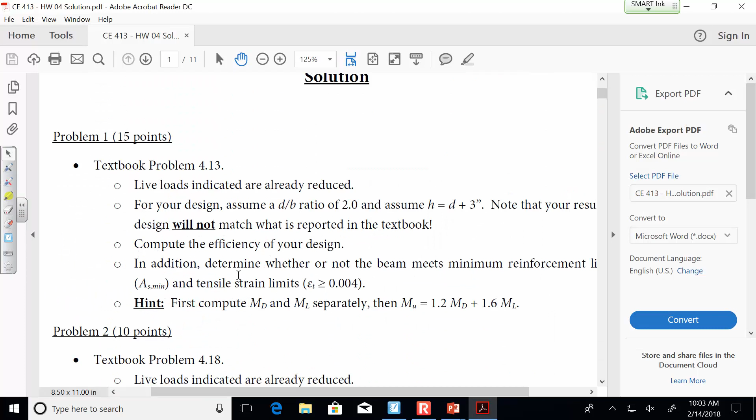Sound good? Okay, I said I would mention a couple things about homework 4, so I thought I'd pull this up. One of the things about homework 4 is that there's a lot of supplemental instructions. For instance, on problem number 1, you're going to do textbook problem 4.13.

There's a couple points to go along with that. The live loads indicated in the problem are already reduced, so you don't have to worry about live load reduction. Now, this second bullet is kind of important: for your design, assume a D over B ratio of 2, and a height of the beam of D plus 3 inches.

Because of that, whatever design you get is not going to match what's in the textbook. The textbook has a design, and it's not going to match. So everybody's going to say 'well, I didn't get what's in the problem' — well, that's why, that's sort of on purpose. These next two: just make sure you compute your efficiency and determine whether or not the beam meets your ACI limits on strain and reinforcement. No big deal, that's basically what you did on homework 3, that's sort of the point of homework 3, so it wouldn't hit you like a bucket of water.

And then the last one, this is a hint — I talked about this in the last example on the slab. Compute the dead load moment and the live load moment separately, then do your 1.2 dead plus 1.6 live to get the factored moment. Don't try to get a factored load and then do WL squared over 8, that's not correct, that won't work. So that's my hint on that.

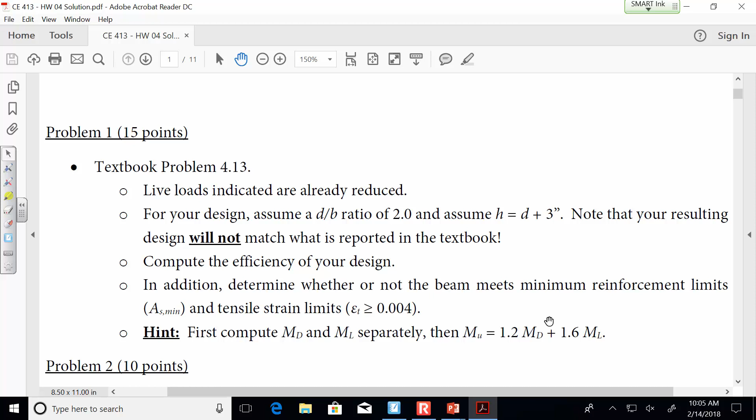On problem 2, what I did is I actually gave you the dimensions of the beams.

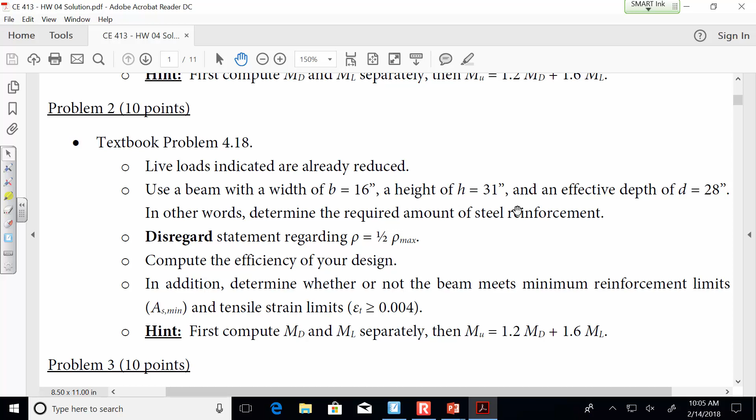The idea on problem 1 is an unknown cross-section. Problem 2 is a known cross-section, so you have the dimensions. The live loads are already reduced. There's a statement there about rho—disregard that statement regarding rho. Compute your efficiency and ACI limits, and the same hint on the moments. Problem 3 is simple, just a slab problem, and the live loads on that slab problem are already reduced. Just 3 problems, yes.

Just 3 problems. Scroll down a little bit more. Is there more? I mean, it's 11 pages. That's the solution. Yeah.

I could, yeah. I don't love you that much. But nice try.

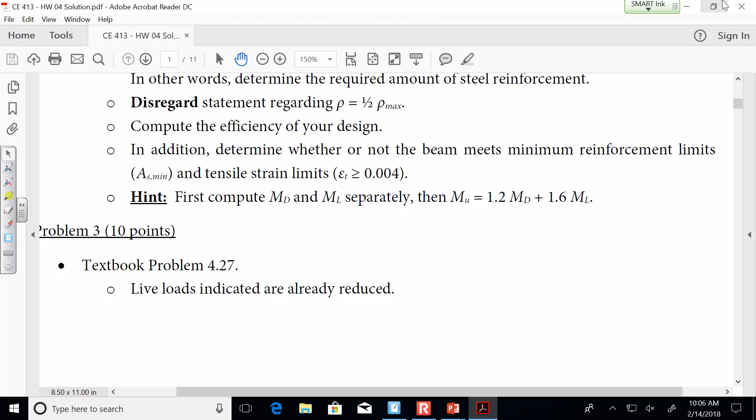So today what we're doing, just so everybody's aware, we are starting material that is not going to be on exam 1. However, two things. One, I don't want you to think it's unrelated to exam 1 material, because it is kind of related. Up until now, a lot of our analysis and design procedures have been focused on rectangular beams, just a rectangle.

And what we're going to be doing now is assessing beams that are of a different cross-section. So it's not like the underlying design principles and mechanics are any different, because they're not. I mean, it's still 0.85 f c prime, it's still the same strain limits and all of that. That's all the same. The only thing that's different is the geometry of the beam. So I know it can be tempting to go, oh, this is exam 2 material, let's just not pay attention. Well, it actually, no pun intended, will serve to reinforce what you're learning on the material on exam 1. I swear I didn't mean for that to come out funny, but it came out a little funnier than I thought. And point two,

I will go ahead and tell you this. This might surprise you. I told you this isn't exam 1 material. It's actually not even exam 2 material, okay? I'm not going to put flanged sections on exam 2. I'm not going to put doubly reinforced sections on exam 2 either. I am going to give you one beefy homework assignment on it, though. But the upside is that you don't have to do it on the exam, because while this is incredibly important material, it is still just more beam stuff, and since exam 1 is basically on moment and on beams, I feel it's not really, why test you again?

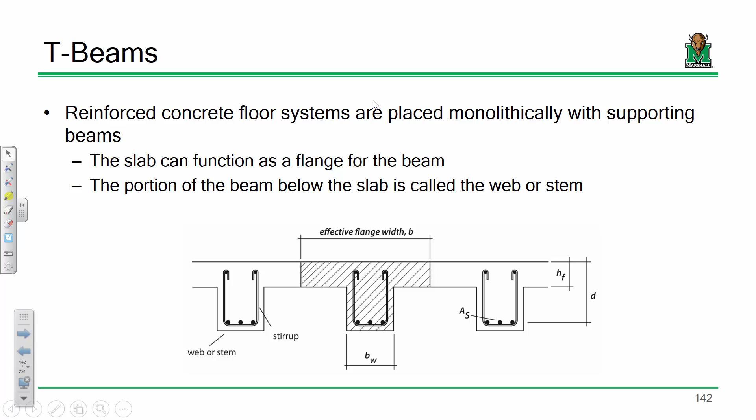Now that's looking at it from the load standpoint - how much load is that beam responsible for. But now I'm asking a different question. If I have this beam and this beam, and slab system cast together, how much of that slab can I count on to be effective for that beam from a resistance standpoint? Is it the tributary width? Maybe it's a little less, maybe it's a little different. What I'm talking about is a concept called effective flange width - how much of that slab can we consider effective in transferring load to that beam. Sometimes it's the tributary width, sometimes it's a bit less.

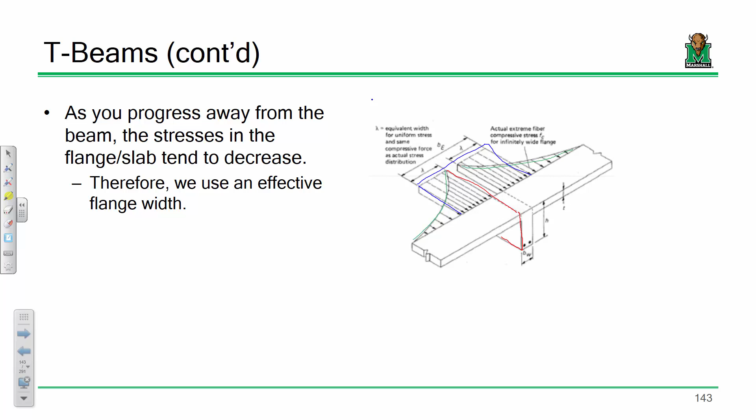Now, let's be clear - what we are talking about is a very complex analytical challenge. It's not simple, it's not something I can just write a differential equation for and solve for x. This is 3D. We're talking about different material behavior, and transfer of stresses longitudinally and transversely. This is not easy to determine, okay?

As you are aware by now, we as engineers sometimes encounter really complicated problems, but unfortunately we've got to have an answer for them. And that's where an empirical relationship comes into play. You've all already used empirical relationships here - the square root of f'c that shows up from time to time, even 0.85 f'c is an empirical relationship. You've probably seen empirical relationships in other classes like hydraulics or transportation. This is another empirical relationship, okay?

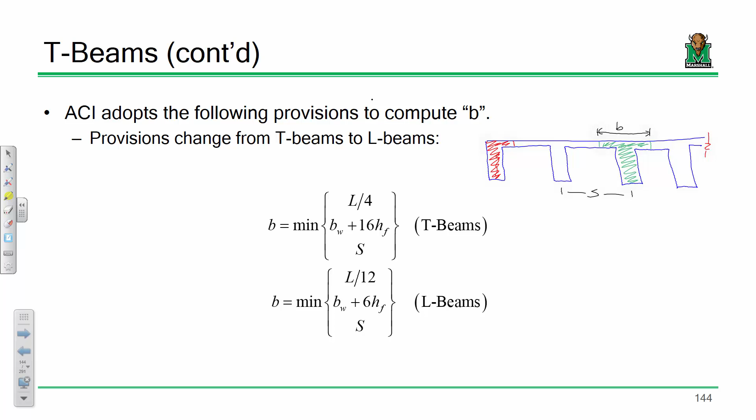Okay, now there's another little challenge that pops up in T-beam analysis, and that's this. I'm going to throw out two terms at you that are going to seem really strange: rectangular T-beam, and true T-beam. Okay? Here's what I mean by that.

Let's look at this from an analysis standpoint. Let's say we're trying to determine MN, nominal moment capacity, or phi-MN, design moment capacity. Doesn't matter, either one. But what's the first step in either one of those computations? Well, it all starts with equilibrium, right? It's the same thing with a rectangular beam or the triangular beam you did on that last homework assignment. No different. I have some tensile force, right? So the tensile force is the area of steel times Fy, and that has to be matched by some compressive force. The compressive force is something like 0.85 Fc prime times whatever area is in compression.

Make sense? So then what you would do is take that relationship and determine how deep does that stress block need to be such that C equals T. But really, in general, what we were determining is how big does that stress block need to be, what's the area of that stress block, such that compression equals tension? Make sense? Now, dependent upon your dimensions and proportions, the area of the steel, etc., you could wind up with one of these two scenarios.

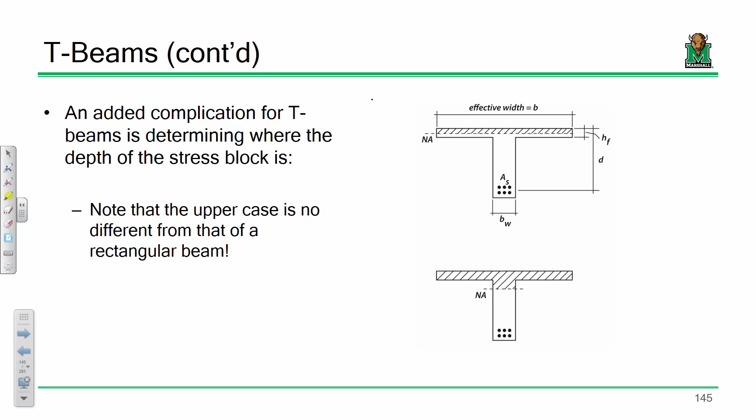One of the things we're going to have to do in a T-beam analysis is actually figure out which one we're dealing with, so that'll be an added complication. Don't worry, we've got a few different examples looking at this, two examples looking at different T-beam scenarios. What I want to do for this, we're in analysis phase, not design phase. What I want to do is compute the flexural capacity of this beam.

So I'm really looking at this from a nominal moment capacity. I just want to stop this at phi-MN. Okay, so I've got a beam.

Now let's make sure we're clear on the terminology. So D is 24 inches. That is from the top of the cross section to the center of the steel. It goes from the top down to the center of the steel. Now, let's see, what else do we have?

So H sub F, I don't think we've dealt with this one directly yet. H sub F is the thickness of that flange, and the thickness of that flange is 4 inches.

Now we have an area of steel. It's actually in 2 layers. That's not really going to matter for our purposes, you're going to see how that isn't going to matter here in a second. So we have 6 number 9 bars. Remember a number 9 is 1 square inch. This is pretty easy. Now let's make sure we're clear on the difference in the B's.

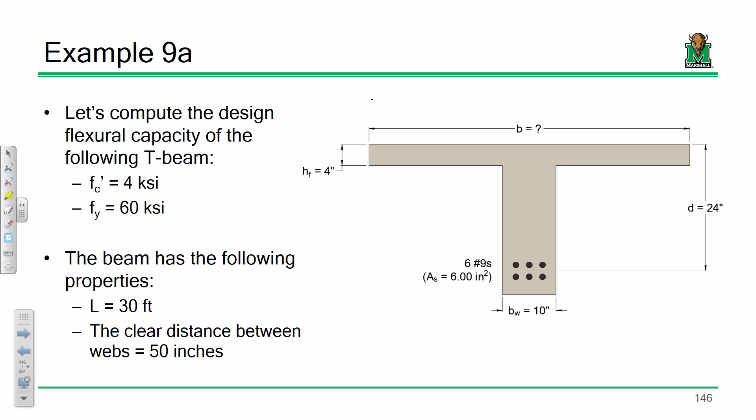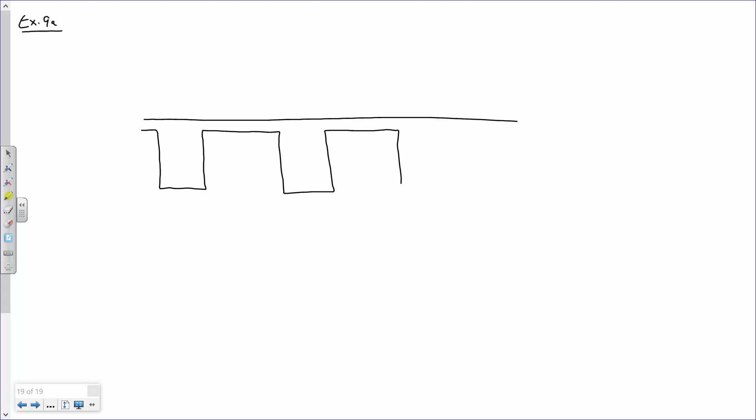Okay. Don't worry, a lot of this is going to get repeated. All right. Okay, so this is going to test my 3D art skills a little bit, but we'll make it work. All right. Actually, I don't like that. All right, so okay. All right.

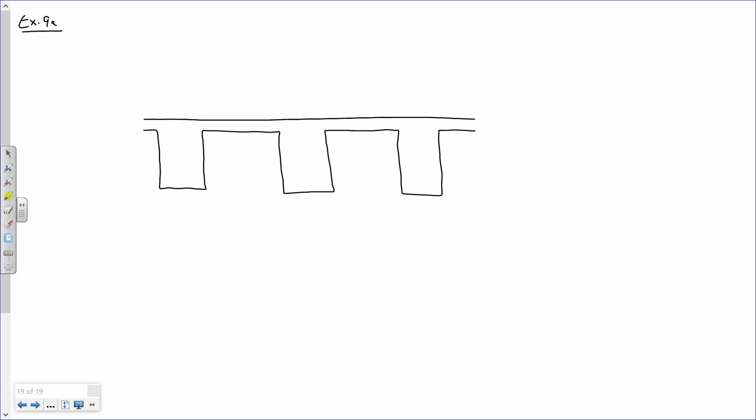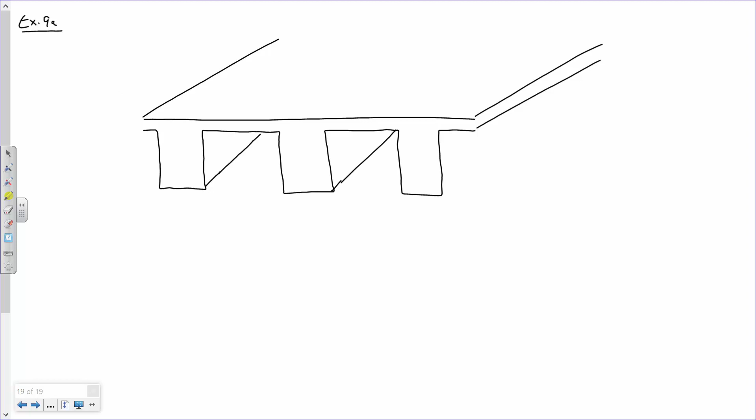Okay, so here's our floor system. Let's get a couple dimensions on here. So this dimension here is H sub F, and that is 4 inches. And then this dimension here to where the center of the rebar is, D, and that is 24 inches.

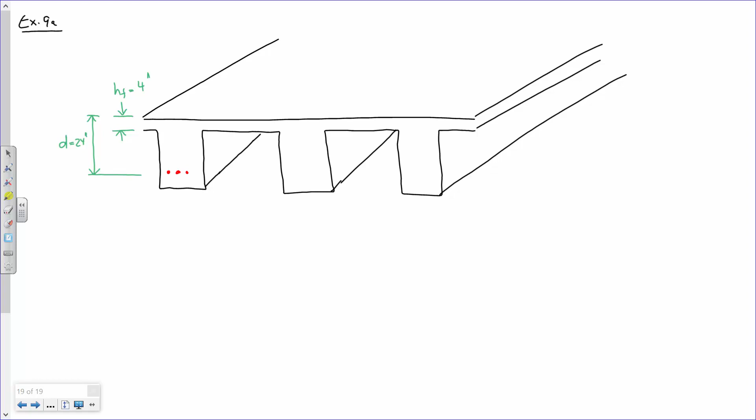Now, this system has sort of 6 bars, sort of looks like that, and they sort of go along the beam. And ultimately what we're trying to determine for a given beam is what is that effective flange width, or at least that's what we're trying to determine right now.

So, about like that. And so we're trying to determine B is trying to determine that dimension right there.

Okay, now let's be clear on something. The problem gave us a few things. It told us that the span length was 30 feet, which we'll need that here in a second. It told us that the web width was what? What was BW?

10 inches. But then what was the other dimension it gave us? It said the clear spacing between the webs, 50 inches. Now, clear spacing between the webs, what we're talking about is literally from face of web to face of web. In other words, if I went out there with a tape measure, what can I measure easily? It's from here to here. Measure that out. Okay, so help me out.

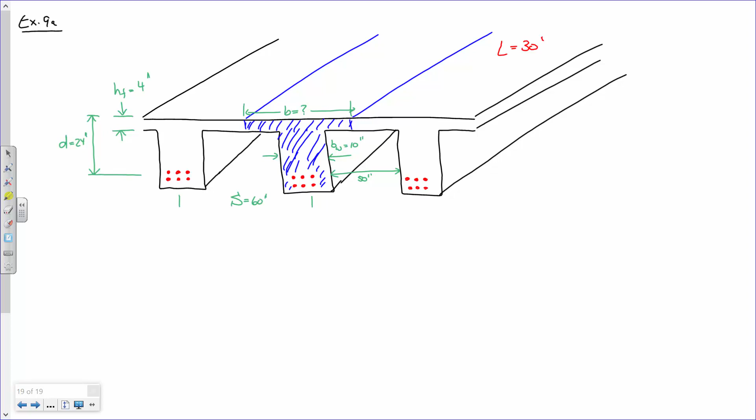What is the actual beam spacing, the center to center of the beams? It's 60 inches, right? Because it's 50 and then half a web on each side. So from here to here, S, and let me do this. When I write my S's, I put a little tick mark on there so that I don't confuse it with 5s. All right, does that make sense?

Okay, all right. Now we need to determine what that B value is, and it is computed as the minimum of L over 4, BW plus 16 HF, and then S. And then again, I like to put myself a little tick mark on there so that I know that's not a 5.

Now watch this, okay? Let's do the middle one first. So that's 10 inches plus 16 times what? 4 inches. Okay, let's do the bottom one. What's the beam spacing? 60. Now what do I do on the top one?

So it's 30 feet, so we got to convert. So 30 feet times 12 inches per foot, divided by 4. So does that make sense?

It depends on your dimensions. When your S changes, your B changes - it's basically the same thing, right? Let's do some number crunching. What are we getting for each of these values? 90, 74, and 60, okay? All right, what happens if your flange height changes to like 3 inches?

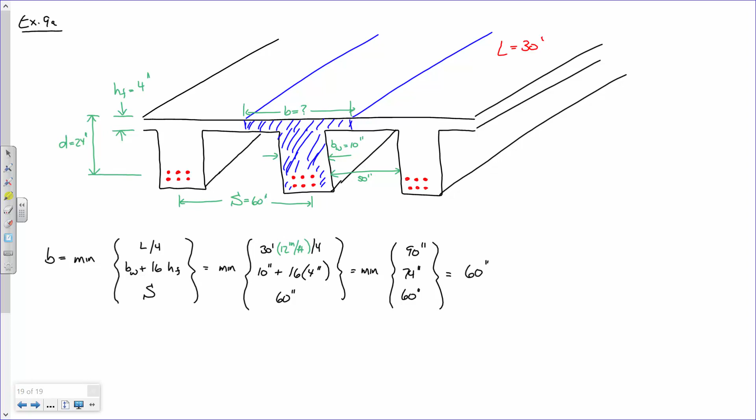No, that's a great point, but that's not what I said. Let's also remember we did slab design and placed reinforcement this way, so it's not like the slab is just hanging out in space unreinforced. Don't confuse that. Remember, there is a difference between how much that beam has to hold up from a load standpoint and how much of that slab we can count on to help that beam hold up that load. Not the same thing. Does that make sense? It just so happened to be the same for this example - not always the same.

Does that make sense? Okay. Now the next step we have to do is make an assessment as to whether this is a rectangular T-beam or a true T-beam, okay? Let me show you how I'm going to do that. We're going to determine the location of the neutral axis.

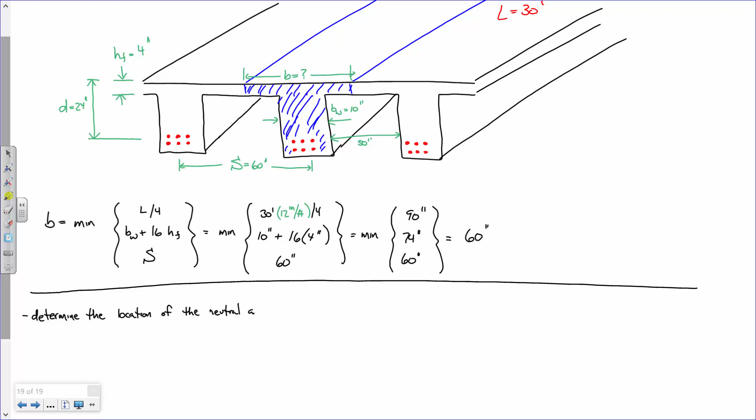Okay, now we're going to do that based on the principle that C equals T. Help me out with this - what is the tensile force in a given beam? Just AS times FY, okay? Now, regardless of the geometry, ignore the geometry - how do we generally determine the compressive force?

So what's the area of steel? 6 square inches times 60 KSI divided by 0.85 times 4 KSI. So what does that come out to be? Square inches - it's an area, right?

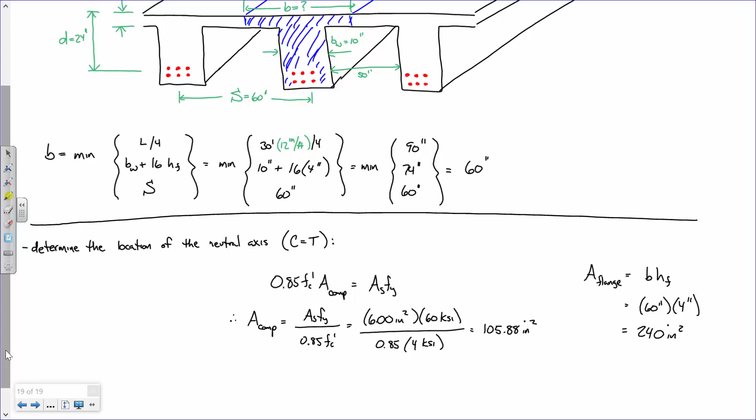Okay, so I'm just curious - based on these numbers, it's a rectangular T-beam, right? It's not a true T-beam, okay? Here's the reason why. Here's your beam.

Okay, so what we did for this area of the flange, we drew a dashed line, and the area of this box up here is like 240 square inches. But we only need 105.88 square inches in order to maintain equilibrium. So what we've got is a stress block that looks something like this. The area of the whole thing is 240, the area of the stress block is only 105. Therefore, we've got a rectangular T-beam.

I'm still confused on what's the difference between a true and rectangular. Okay, basically, if it was over 240, then it'd be a T, right? It's going to be a little clearer after the next example, but just bear with me on this explanation.

Do you agree that the area of the top of that flange is about 240 square inches? Would you agree that the amount of compressive stress block we need is about 106 or something like that? So we can fit that stress block up here. So the stress block, what does it look like? It's a rectangle, right? So this is a rectangular T-beam.

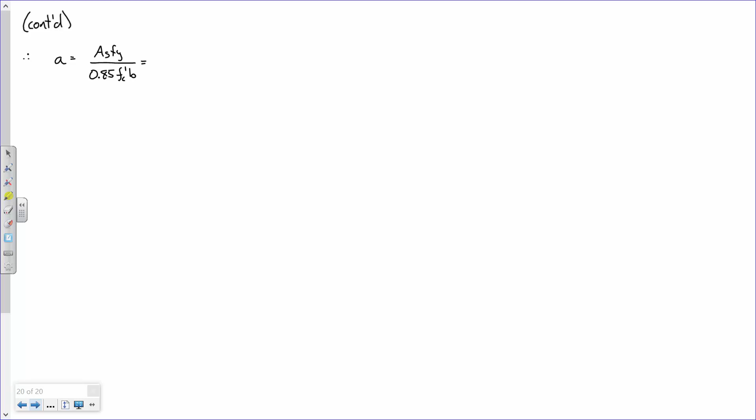I propose that if you have a rectangular T-beam, then the calculations are as follows: A equals As times Fy, divided by 0.85 Fc prime B. Now pop quiz, which B do we use? That would be the depth of the stress block. No, A is the depth of the stress block—you're right about that—but what B do we use?

60. We use the width of the stress block. So: 0.85, 4 KSI, 60 inches, and then 6 square inches times 60 KSI. Now let's compute this and see if this is a number that makes sense.

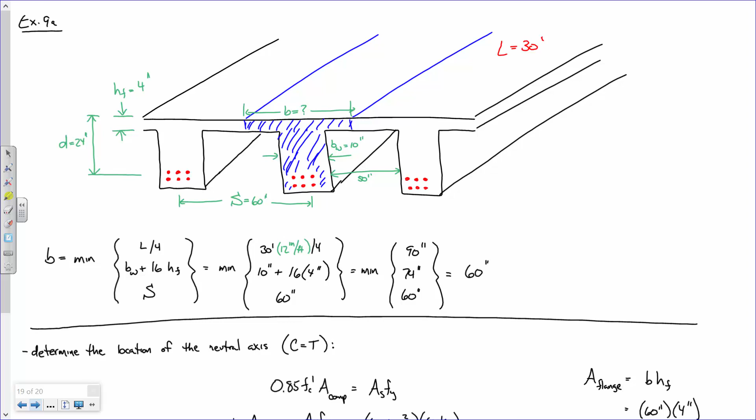Without doing any calculations, would it make sense if this came out to be exactly 2? Let me illustrate what I mean. Not exactly 2, because for the depth to be 4 inches, like if the stress block was 4 inches deep, the area would be 240. If the stress block was 2 inches deep, it'd be 120, right? So what I'm saying is it's probably a little less than 2. 1.76 - does that make sense?

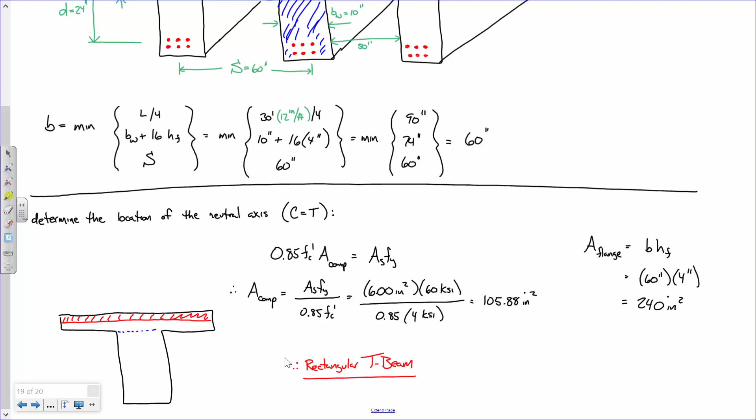If the rectangle is 4 inches deep, it's 240 square inches. So for it to be 105.88 square inches, it's probably got to be about 1.7 something inches, right? Does that make sense? Again, I want this all to make sense. Are y'all good?

1.765, is that what we got? Okay, so now that we've got this, we can compute our Mn just like we did before. This is no different, it's just a rectangular beam. As, f y, times D minus A over 2. So that is 6 square inches - my decimal point is not showing up, and that's bugging me.

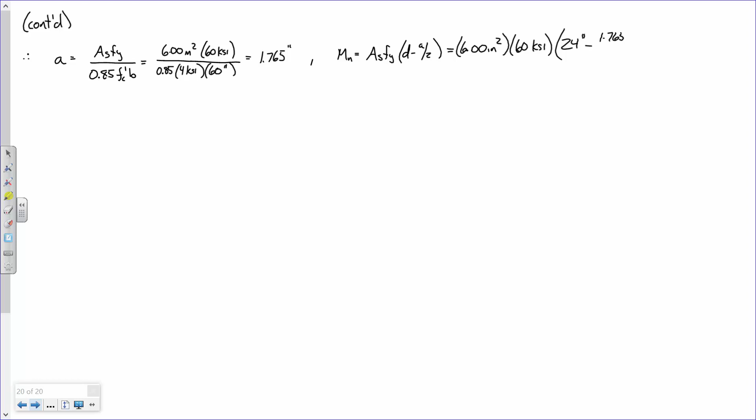And 60 KSI. See, was it 21? 24. I swear, when this pen gets closer to this top right corner of the screen, it does not like me. 1.765 inches - it's running out of ink. Now that was good, that was good.

Now what are we getting here, and what are the units going to be? Inch kips. And what's the value? 8322.3 inch kips. And in foot kips, what does that come out to be? We'll just keep it simple. Something like that.

What do we do now if we want to determine phi Mn? This is a good review for the homework and the exam. Continue that thought. But you hesitated - why? Because you don't know whether or not it's 0.9 or not. You have to verify that. Now how do we verify that? Where do we start? Well, it's the strain in the steel. What I'm asking is, what is the first step to getting the strain in the steel? Beta 1 and C, so there we go.

So what is beta 1 for 4 KSI concrete? 0.85. So C is A over beta 1, which is 1.765 inches divided by 0.85, which is what? Say it again. 2.076. Do I have a second on that?

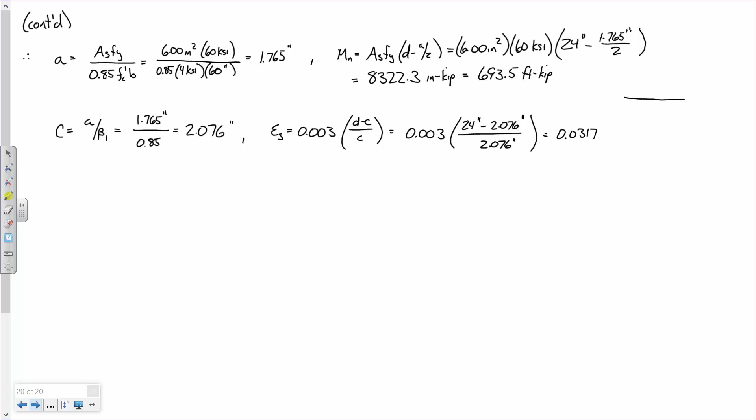What about the strain in the extreme fiber? Well, just make sure you're using common sense on some of the dimensions and the specifics on what's going on. Remember, here's your steel, right? Okay, now what does your strain profile look like? We got that, right? We have a strain in compression, and then it goes down to a strain in tension, right?

Now if we want to get technical, what we just computed was the strain in the middle. But if I wanted to get scientific about it and compute the strain at the extreme fiber, all we're going to get is a value that's even larger, right? It had to be over 0.004 for it to be good on ACI limits, and it had to be bigger than 0.005 for our phi value to be 0.9. Well, at the center, it's 6 times what it needs to be. If we go down, it's just going to be even higher. Does that make sense? And usually on T-beams, depending upon especially rectangular T-beams, you usually have no problem at all with limits like this.

So I propose that phi is 0.9, and phi Mn is 0.9 times 693.5 foot kips, and phi Mn is what? 624.2? Do I have a second on that?

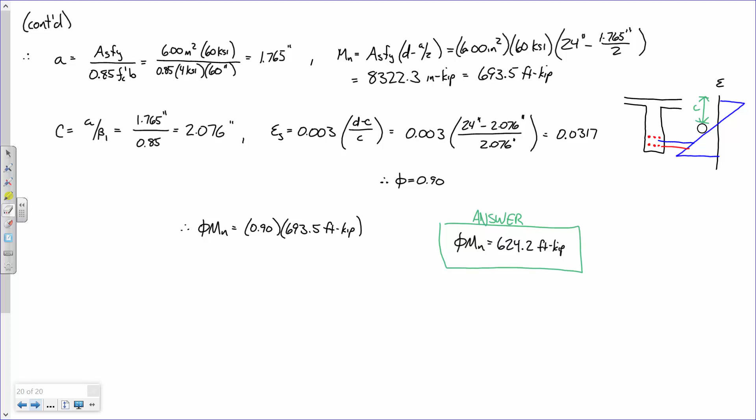Okay, that's to the neutral axis. Yes, so remember, A is the depth of your stress block, C is that. On the slide before this example, it has the neutral axis and hash marks. There is a difference between C, which is the depth to the neutral axis, and A, which is the depth of your stress block. Remember, there's a difference. The hash mark is above the neutral axis.

No, what this slide is showing is the stress block, and then it has the neutral axis label. Oh yeah, I guess you're right, that should be lower a little bit. I see what you're saying. In this slide, it's referring to neutral axis based off compression and tension. I could see where that would be a little confusing.

You're right. So to be technical, your stress block is sort of like that, and that's going right here. But your actual neutral axis, where the strain profile is, is a little lower. So there's a chance that your neutral axis could be below the point where your stress block ends. And that doesn't affect it changing from being a rectangular T-beam to a true T-beam at all. The only thing that delineates whether it's a rectangular T-beam or a true T-beam is where your stress block is. That's a good question.

So that's a really good point to make. But it doesn't affect your capacity check at all. So, any questions?

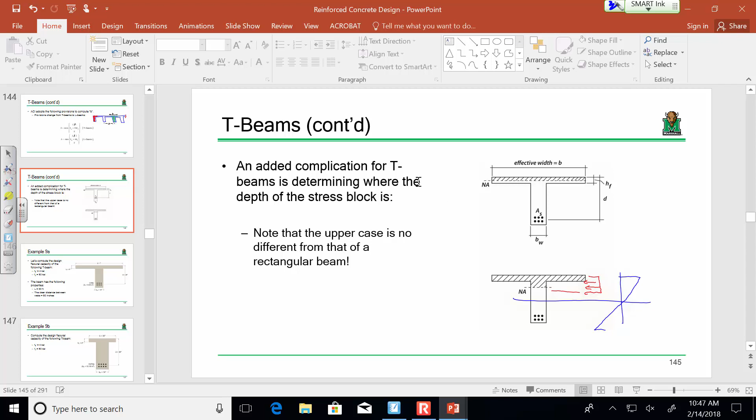All right, now for those of you that have powers of precognition - if example 9A was a rectangular T-beam, let's take a broad wild guess as to what's going on with example 9B. It's a true T-beam. Okay.

Let me walk you through what's happening and what's going to happen for the next couple weeks. So what we've done now is an assessment on how to analyze a T-beam. We're going to do another analysis on how to analyze a true T-beam. The next step is to look at how to design a true T-beam or a rectangular T-beam, basically just design a T-beam. That'll be what we do next.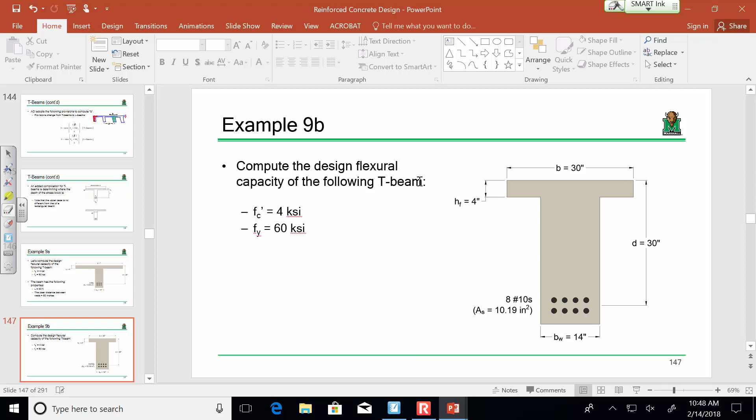After that, I want to illustrate this so everybody sees the path moving forward. After that, we have an analysis of doubly reinforced beams. The idea is this: up until now, we've only considered reinforcement in regions of tension. That's what a singly reinforced section means - only reinforcement in the tension region. But in reality, when you're tying together your rebar cage, you generally have a little bit of reinforcement in compression anyway.

So the last thing we do with beam analysis, with moments, is how do you analyze the capacity of a beam that is doubly reinforced? I'm not going to lie, it actually gets a little interesting because you have to check and determine whether or not the compression steel even yields or not. Sometimes it does, sometimes it doesn't. The tensile steel always has to yield, but the compression steel can - sometimes it does and sometimes it doesn't.

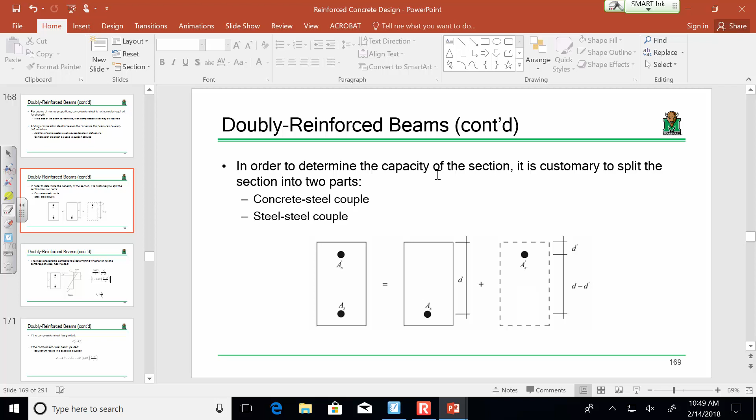There's no requirement that says the compression steel has to yield. And if it doesn't yield, the analysis gets a little trickier. It's kind of nifty, but I think it's worthwhile to do. We don't really design a doubly reinforced beam, but we need to understand that math in order to understand how beam columns work later.

After that, we get into exam 2 category when we start looking at shear, okay? Because up until now, one of the things we haven't discussed are these stirrups that go along the beam. Stirrup design and shear design is its own unique snowflake, and that's going to be where our exam 2 material starts.

After shear - we've done moment, we've done shear - then we do deflections. So, and then you can see the path moving forward. That's all I got, guys.

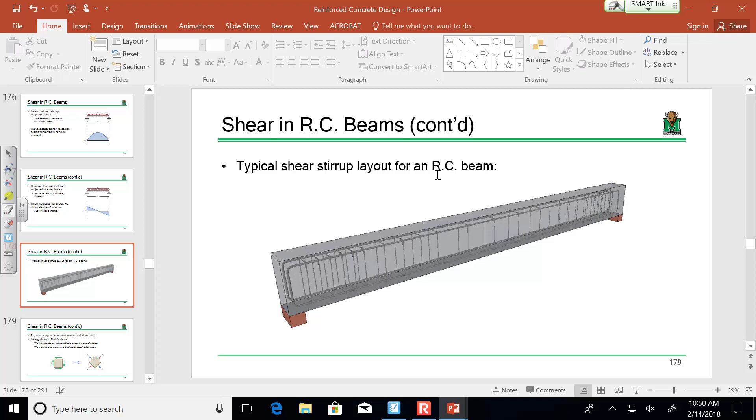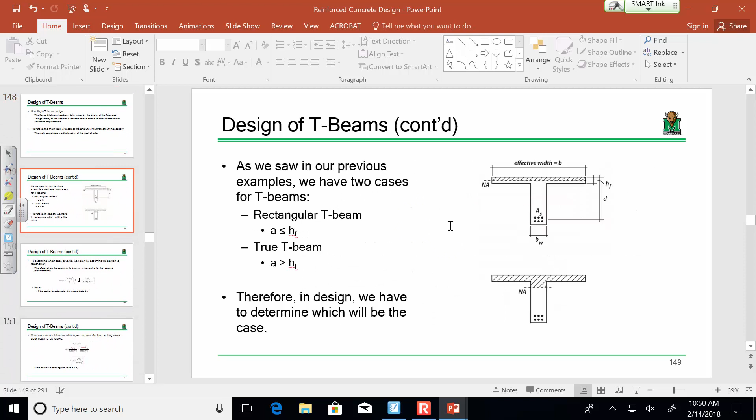Happy Valentine's Day. Hey Dr. Miles, can you tell me the last page? Yeah, hold on, I got to get back to where I was on the slides. The way it saves. All right.